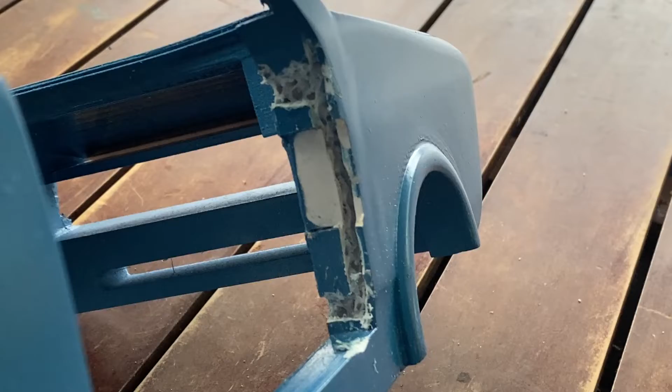Total redesign this. That looks good, doesn't it? That's both sides done, and you see how it's going to work.

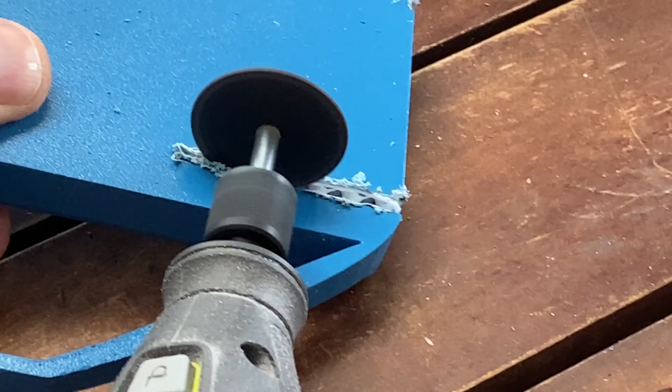Miserable day today, pouring with rain. Now I'm going to make the new hinges for this car out of aluminium tubing and some rod. There's actually loads of videos on YouTube showing you how to make this from the small model car makers. They use these, so I'm going to have a crack at that.

Right, we're going to bend this wire. First of all, a 90-degree bend. And now we're going to bend a curve in it, like that. And we've got to bend it out this way, so you end up with a piece like that, and then we need to cut it off. Voila. So I've made 4 of these, and they fit in the tube like this.

And that then is meant to be the hinge. Right, I'm going to epoxy these hinges in. I hope this works because there's no going back.

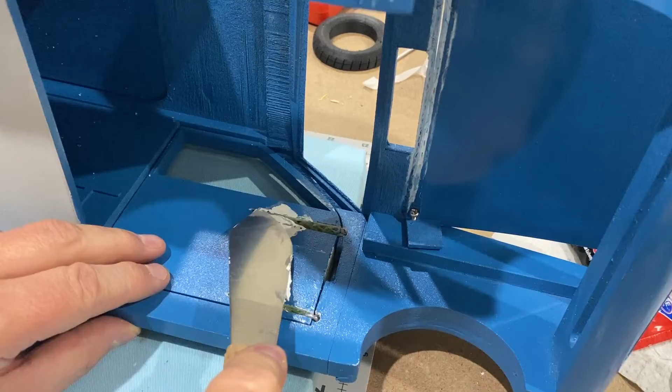Okay, well that's done. Now it's time to touch up this. So more filling and sanding. Anyway, it's filled and going to give it another coat of paint.

Well, I finally got this back to where I was at the end of the last video, which is with the bodywork painted, only this time better hinges. So that was definitely worth it.

So now I'm going to turn my attention to the bottom. Now I'm not going to go overboard on this bottom, but I do want it to look a little bit like this photograph here. So I've been busy on Fusion 360 and I've printed some parts.

So this is going to go underneath at the front. This is going to go underneath in the middle. And this is going to go at the back. And if you look at the writing there, you'll see that this is, when it's finished, going to be a gigantic dinky toy, but one that they never actually made.

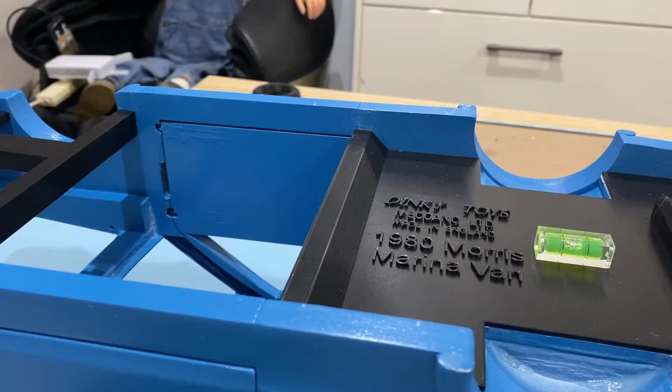Right, just glue this on here. Nice fit, I just want to make sure I get this front bit level. Now I want this bit to be removable so that I can get to the inside, so I'm going to screw this on.

Well, there we are. Doesn't look too bad. Dinky toy. So now I've got that done.

Time for some wheels. So to make this tyre in Fusion 360, I had to do a little bit of research on YouTube, and the video I found most helpful showed you how to model a tyre and a wheel. I followed this pretty closely to make something that would look like a Marina van wheel, and I'm just going to show you an animation of that design process.

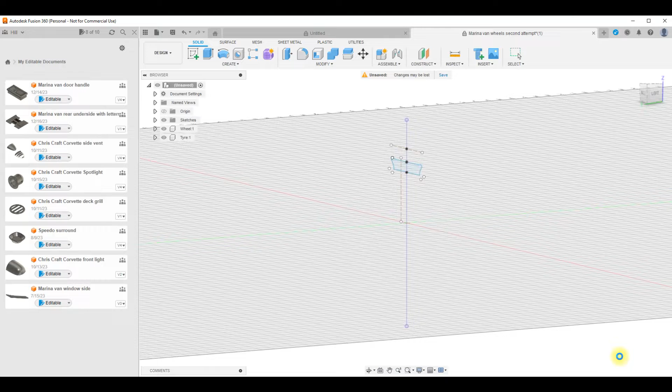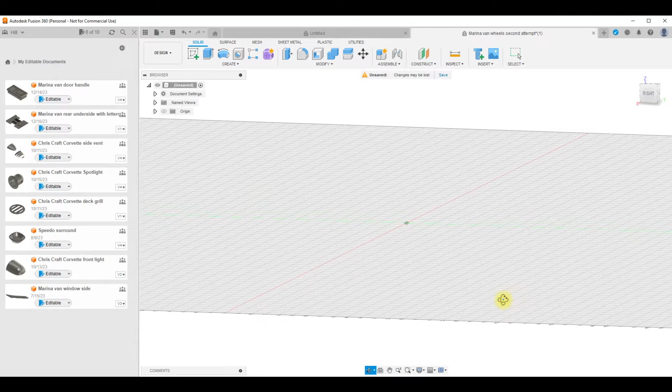You'll see how the wheel is created using the sketch and rotation functions, and you can keep adding details on, even to get into the treads. Now if I turn this around, you can see what it looks like from the other side as the design comes along, showing the outside of the wheel and some of the details, and the various functions of Fusion 360 actually make this quite straightforward once you've got the hang of it.

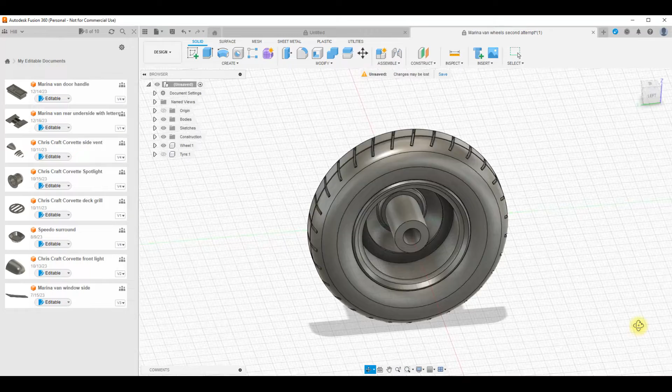So I finished up with this, and that's the inside, that's the outside. Now I was able to export this as a file that can be read by my 3D printer, and I was able to print the wheels and the tyres separately. Look at these beauties.

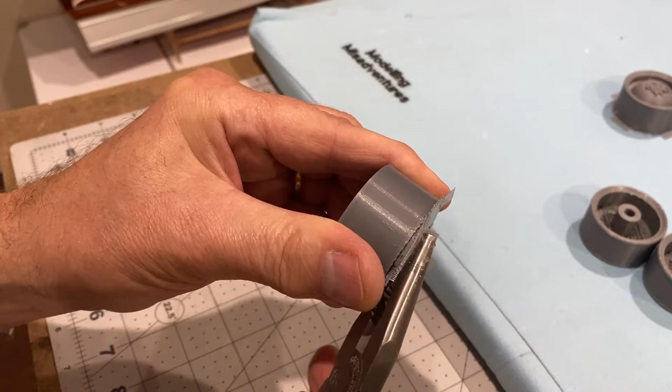Well, these have come out pretty well. So I'm just going to go and give these a spray of silver paint. Now these are my 4 wheels. Don't look too bad, do they?

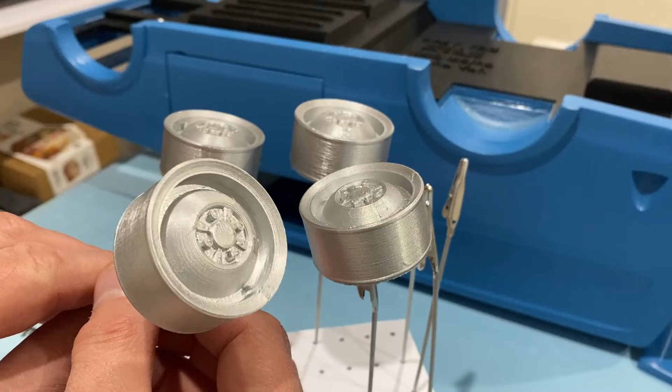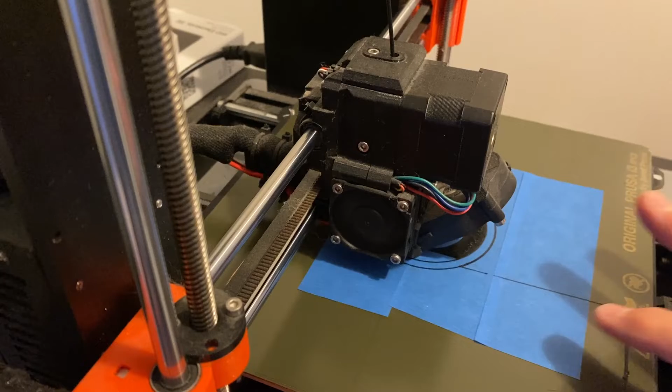Now to print these tyres, I'm using this special TPU filament - you can see how flexible it is. And there's the tyre being printed. I've put this masking tape down because the first time I tried it, it stuck so hard to the plate I could hardly get it off. So anyway, that seems to work, and that tyre's printing nicely.

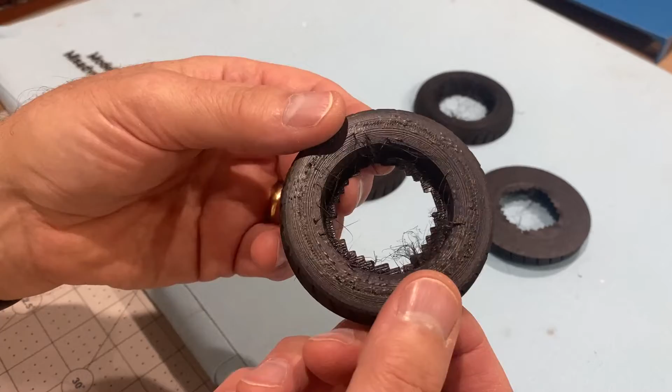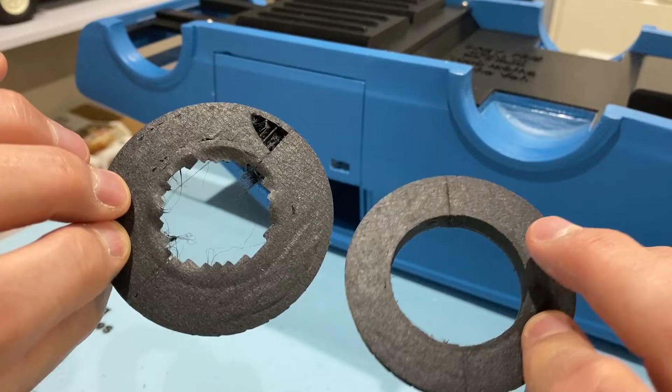So this is how these tyres have come out. I've printed them in halves. They're going to need a bit of cleaning up, but you can see they are quite rubbery, which is really good from a 3D printer. Then I'll be gluing them together like that. So this is what the tyres look like before and after cleaning up. Not bad. Okay, let's put them together.

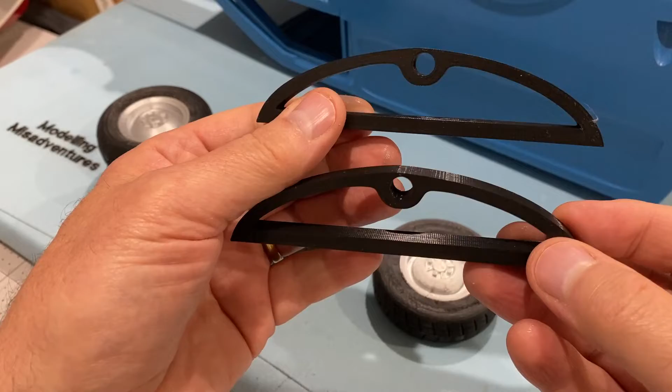So I've got my wheel and tyres done, and now I need some axles. I'm going to use some of this threaded rod here and an aluminium tube for the axle. I've also 3D printed the axle supports - these things are meant to look a little bit like leaf springs, obviously not very accurate, but they'll do.

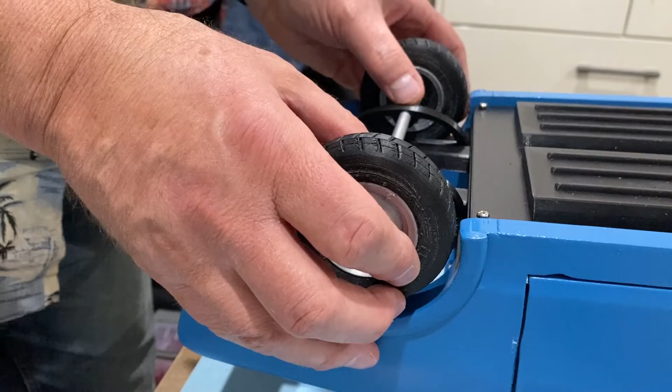This looks all right, doesn't it? Well, there we have it, finally got the wheels on. So looking pretty good - the bonnet on, opening and closing, the doors, you can see inside, and the wheels on the bottom. Really happy with how that's coming along.

So I think I'll leave it there for this video. Still got plenty more to do - got to do the inside of the cab, might have a go at an engine, front grille and bumper bar. But for now, that's it.